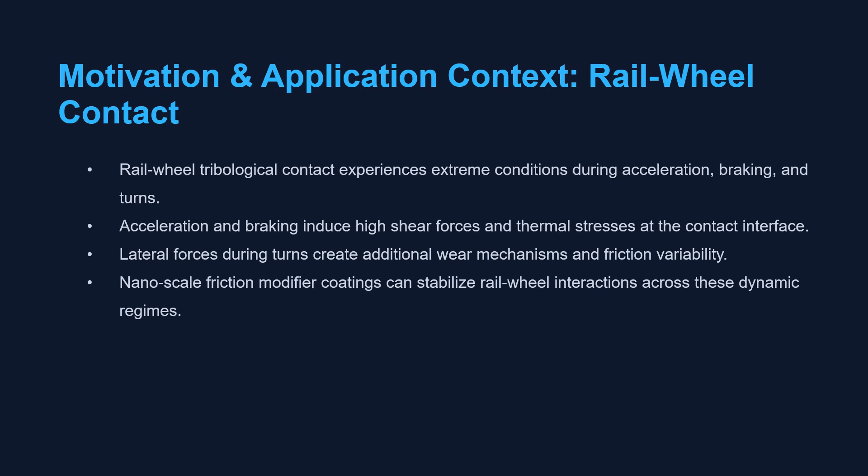Traditional liquid lubricants struggle here. They wash away, degrade under extreme pressures, and can't provide consistent friction across all three regimes. Solid lubrication offers a fundamentally different approach. We deposit engineered nanoscale coatings directly on rail and wheel surfaces. These coatings remain in place, respond intelligently to operating conditions, and can be optimized for railway specific demands.

Our published work had four objectives. First, develop a nanoscale solid lubricant coating system for Indian Railway Standard rail steel. Second, establish a reproducible deposition methodology for uniform stable coatings. Third, characterize friction and wear across realistic operating loads, speeds, and temperatures. And fourth, critically, build surrogate models that predict friction behavior without running hundreds of tests. These models enable rapid optimization for different railway networks and train types.

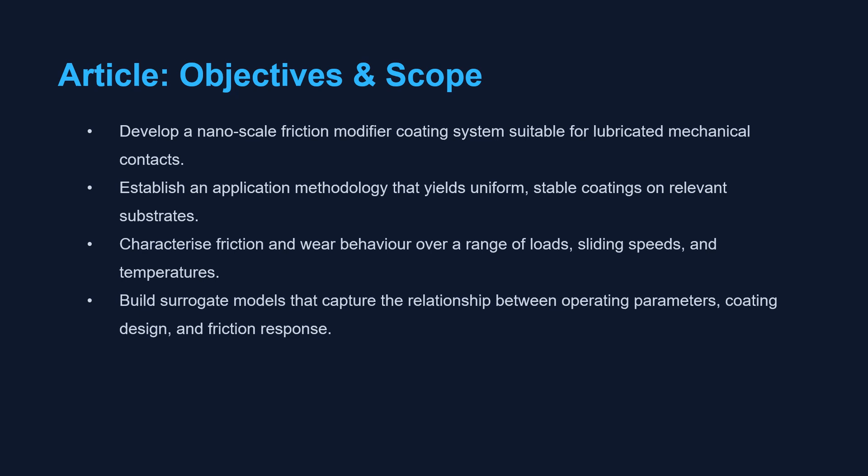We tested on actual IRS rail steel using ball-on-disc tribometry to simulate rolling sliding contact. We deposited solid lubricant coatings with carefully controlled thickness and coverage, then measured friction across a systematic matrix, varying loads representing different train masses and varying sliding speeds.

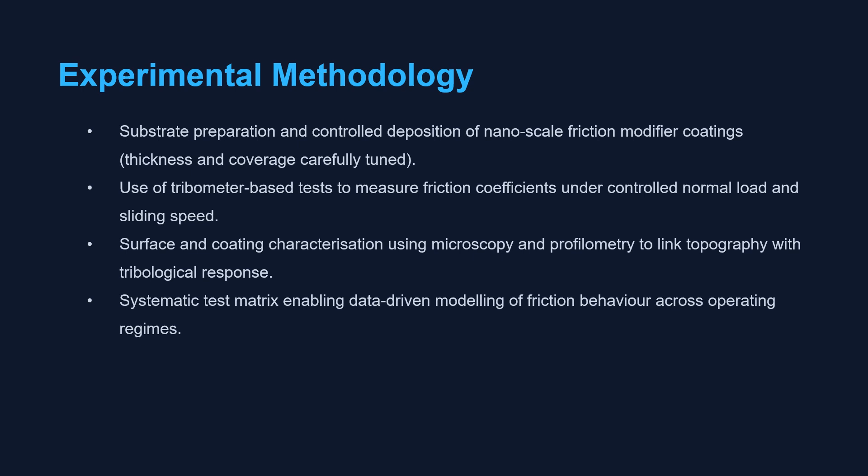We used scanning electron microscopy and profilometry to understand coating structure and its relationship to tribological performance. This mechanistic understanding is essential. It tells us why the coatings work, not just that they do.

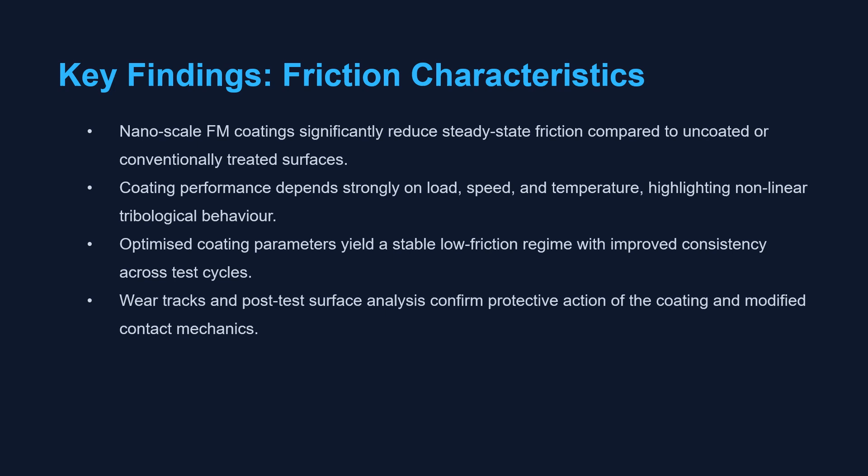Third, post-test wear analysis revealed the protective mechanism. The solid lubricant coating transfers a protective film to the counterface, reducing direct metal-on-metal contact and subsurface damage. This is the fundamental advantage of solid lubrication. It sacrifices a tiny amount of coating to protect the underlying rail steel from rolling contact fatigue. This solid lubrication approach is especially suited to railways because it's durable, predictable, and doesn't depend on liquid film continuity.

We trained surrogate models on experimental data to predict friction from operating parameters. For railways, this is transformative. A network can now ask, for this specific train mass, speed, and track temperature, what will my solid lubricant coating deliver? And get instant predictions. These models enable sensitivity analysis, identifying which parameters most affect solid lubricant performance, and optimization of coating design for specific railway applications. The framework extends to different solid lubricant chemistries and rail grades globally.

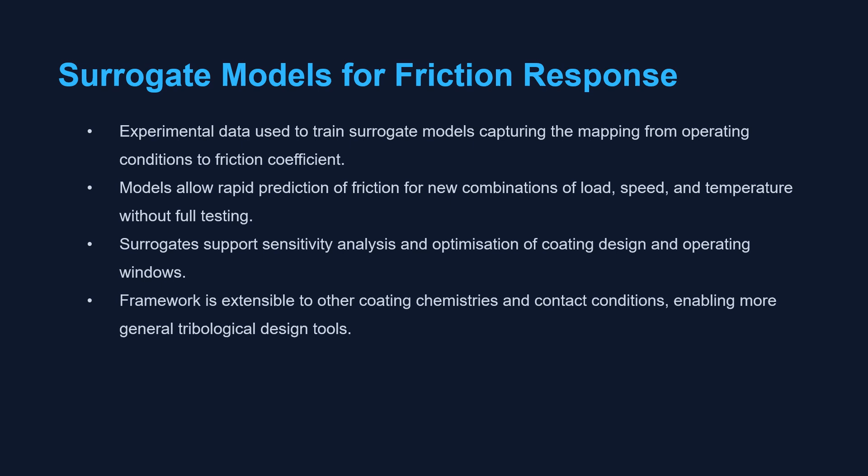Our published work proved solid lubricant coatings work. Now we are advancing to multi-component solid lubricant architectures. We realized that acceleration, braking, and turning demand different solid lubricant characteristics. Multi-component designs let us tailor different functional zones, one optimized for high traction during acceleration, another for controlled braking, another for lateral force management. We developed a novel deposition technique enabling unprecedented control over solid lubricant layer architecture, composition, and nanostructure.

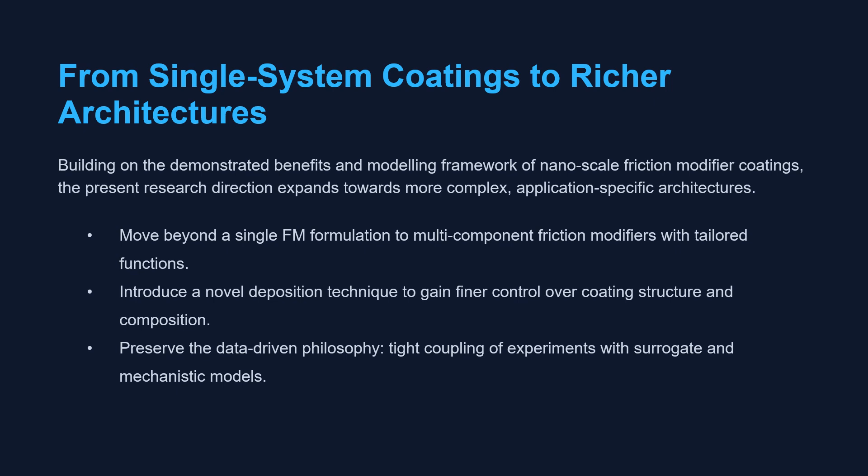Multi-component solid lubricant coatings combine different nanoscale constituents. During acceleration, you need solid lubricants promoting load transfer and traction. During braking, you need ones providing reliable, controlled friction. During turns, you need to manage lateral forces without excessive slip. By engineering multiple solid lubricant phases within a single coating, we achieve targeted control across all regimes. The design space expands dramatically, but our surrogate models make exploring it computationally feasible.

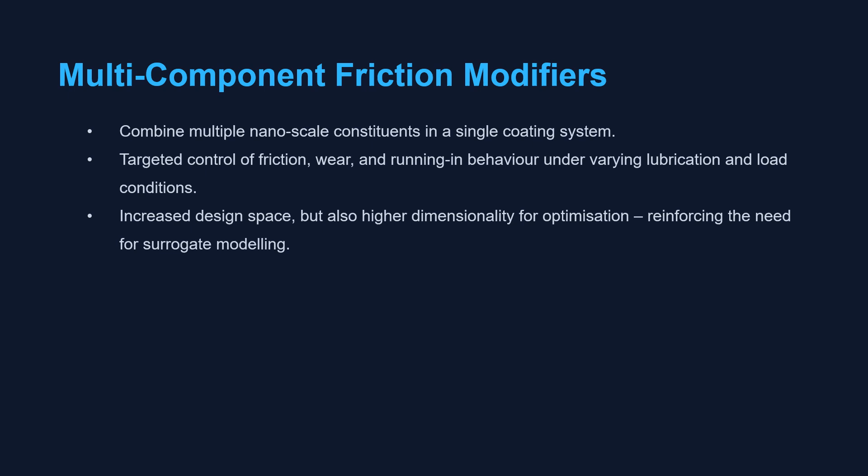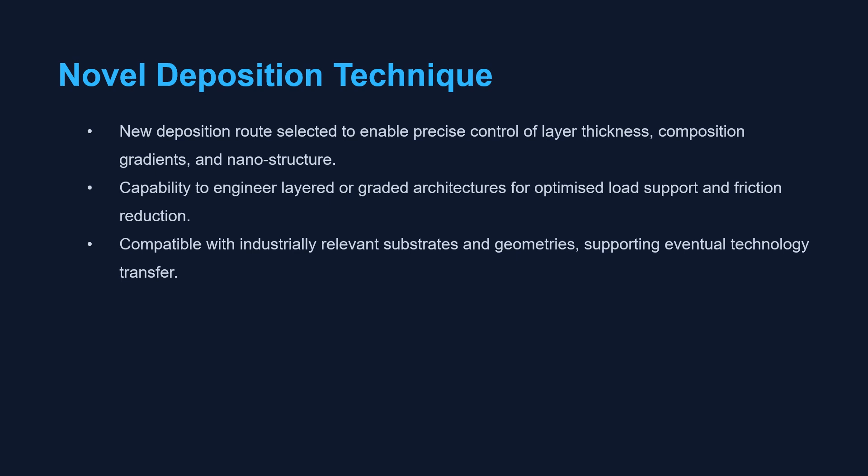Our novel deposition technique enables precise control over solid lubricant layer thickness to nanometer accuracy, composition gradients, and nanostructure. We can engineer layered solid lubricant architectures, each layer optimized for specific tribological functions that support extreme rail wheel contact pressures while maintaining low friction. It's compatible with industrial rail production, allowing deployment on real railways at scale.

This research has generated 4 significant conference presentations, all focused on solid lubrication and railway applications. ICFP 2025 in Tirupati on water-based solid friction modifiers. ICTA-SEM 2025 at IIT Kharagpur on morphological effects of solid lubricants versus binders, and parametric studies of solid lubrication on IRS rail steel. INECOM 2025 in Hyderabad on mineral versus oxide solid lubricant systems. This work bridges nanoscale solid lubricant design with real Indian Railway deployment.